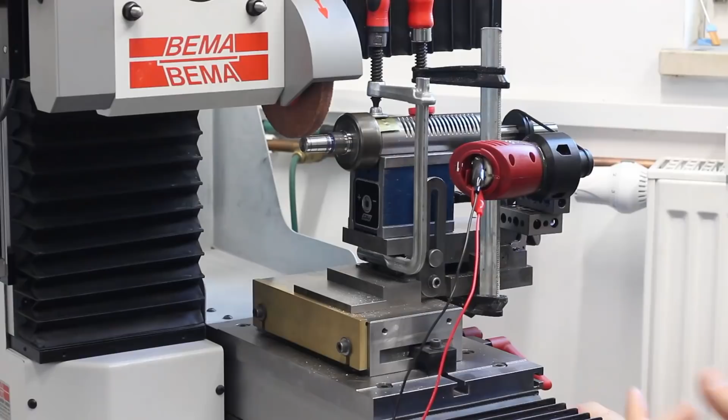So as you can see, we're grinding another drill press spindle here on the surface grinder, and the new BEMA grinder with its way larger work envelope than my old lip surface grinder has made a huge improvement in doing the setup very fast and easy. For one, the additional Z height, or in case of a surface grinder, that's the Y-axis moving up and down, if you go by the correct nomenclature.

Correct nomenclature on a surface grinder: table traverse, X-axis. Grinding wheel side to side is the Z-axis because it's in line with the spindle. On a machine tool, always, if you use the right nomenclature, the Z-axis is in line with the spindle. On a lathe, the bed slide or carriage is the Z-axis, and the compound slide is Z0 because it's at 0-degree position, also in line with the axis.

And the height movement on a grinder is Y. This is basically the same as a horizontal mill. There is an ISO standard for that, so not terribly interesting, but maybe good to know. The additional height here allows me to use a proper sine plate. I bought this years ago from my day job. They wanted to throw it out, and I got it along with the Moore rotary table and some other stuff. And on my lip surface grinder, this is way too tall to use.

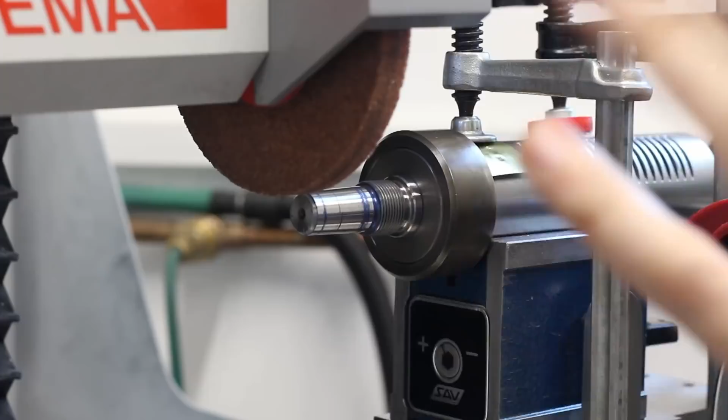So let's proceed on grinding this taper. While we're here, I will look at the grinding wheels that I use commonly later, but first we have to finish this.

So this was a 0.01 millimeter depth of cut, means 0.02 millimeters in diameter. And now the magic, get the table out. As you can see, the taper does not clean up, and it won't, because there is really heavy galling back here, but the galling is below the surface, and we still got a huge bearing surface here on this taper.

And I really do not want to draw this taper back much more, otherwise we will have to shorten the thread here, and the customer has to shorten the nut that's used to push the chuck off the spindle, and it creates a whole lot of additional, well, not problems, but issues.

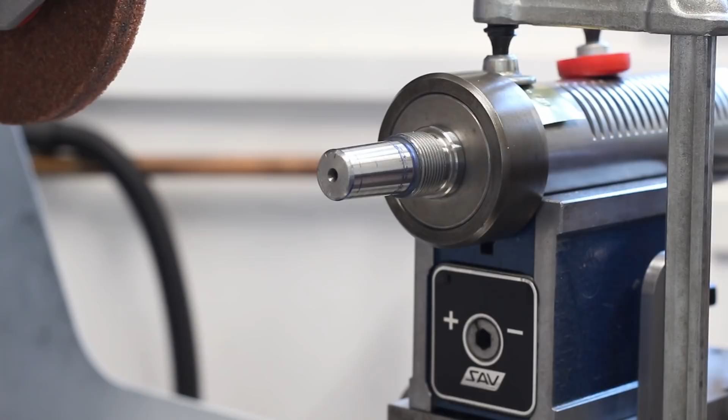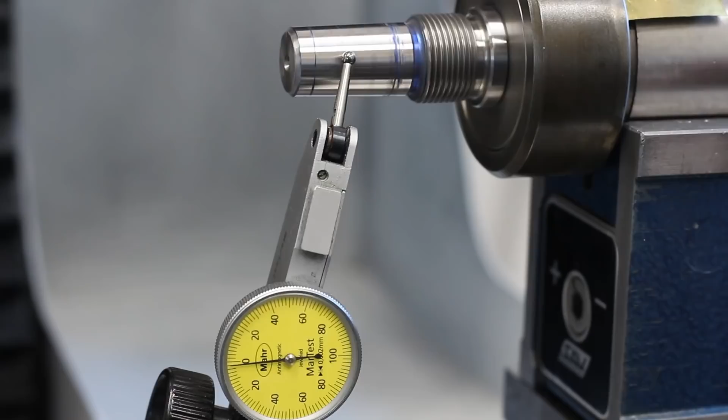So just to give you an idea how well this taper runs after grinding it in its own bearings, this is a 2 micron indicator. We have contact. Let's zero it out. This is truly not bad. That's how most drill press spindles come out after grinding them.

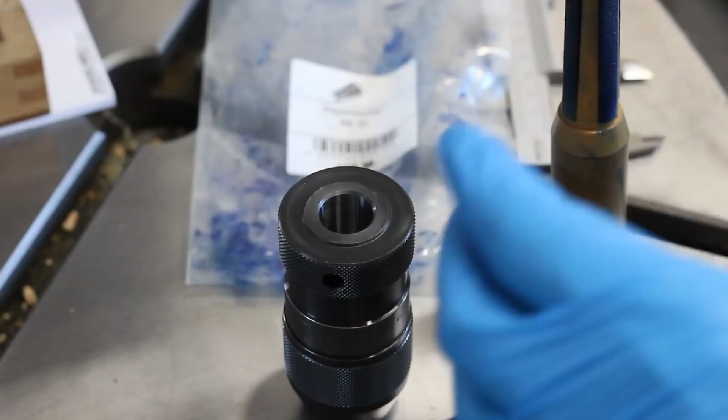The trouble with checking tapers is you always need a taper master. You can either buy one, very expensive. You can make one if you're set up for it, like ID grinding, but then you still have to check it. You can check them, for example, with 2 gauge balls of different size that you drop in the taper, and you check the depth that the ball drops to with a very precise indicator, and do your math and figure out if the taper of your gauge that you made is correct.

Or you use a known good taper like this Röhm drill chuck, which I trust. And then you need some high spot blue. In this case, I'm using the Dykem stuff because this gives a very, very good print. That's also the reason why I wear gloves, because the stuff never gets off your fingers again. And to apply it in the taper, I use an old Morse taper wiper. This has proven to work very well.

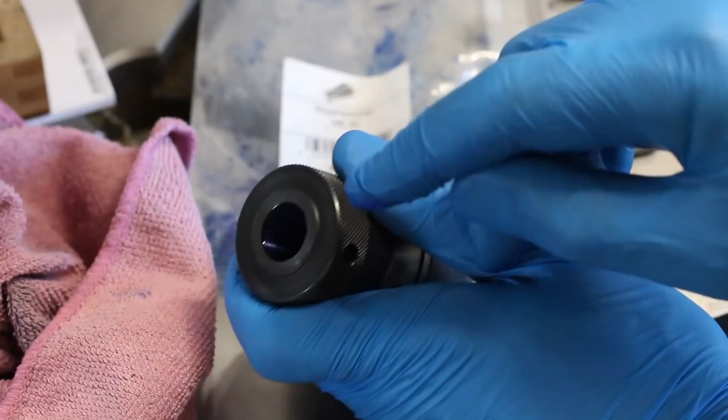Just a little bit, well, that's a little bit more than a bit, on the leather of the wiper. Try to keep your gloves clean. And then you can just use this to put a thin layer on. You will get some practice on how heavy the blue has to look to get a reasonable result when doing your checkup. With the Dykem, it will always look relatively dark because Dykem has a very heavy pigment in it, but it spreads out very thin.

That's why I like it for tapers. It shows a very precise print. And you get just an even coverage all around. That's the benefit of using the wiper here instead of trying with your finger or with a piece of shop towel or something like that.

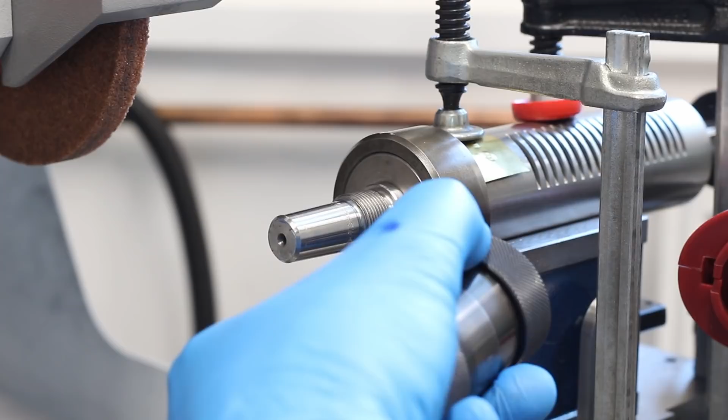So the next thing that I constantly see people do, they take their master or gauge onto the taper and they spin them like crazy. Spin them back and forth, and just with your hand motion, you will make every taper fit perfectly that way. You will cantilever it slightly, spin it, and that way you will nicely blue up the whole taper, but that's not what you're after. You want a realistic representation of this taper in relationship to this taper. Otherwise, we could just skip this and have dinner.

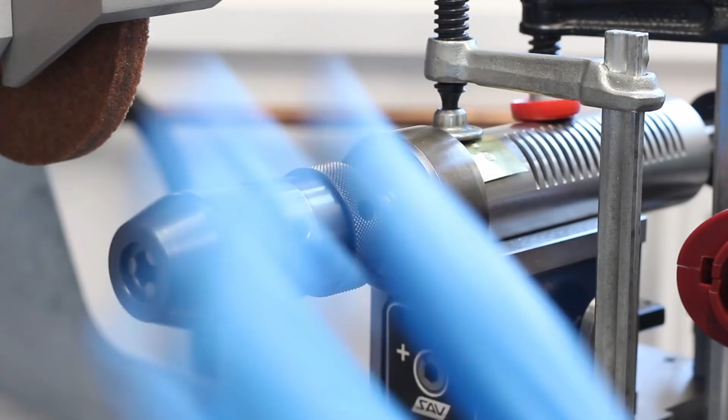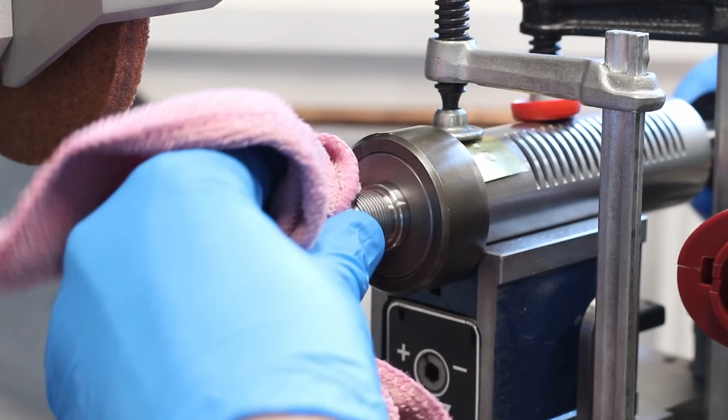So what works better is you take your master, you put it on, you press it on. We don't spin it around, we just press it on, and then we get it off again with a very minute spinning. And even this, as you can see, is a blatant mess. So we will redo it. I had too much of the layout blue on here. To be honest, bluing up tapers is one of the most annoying tasks I can think of.

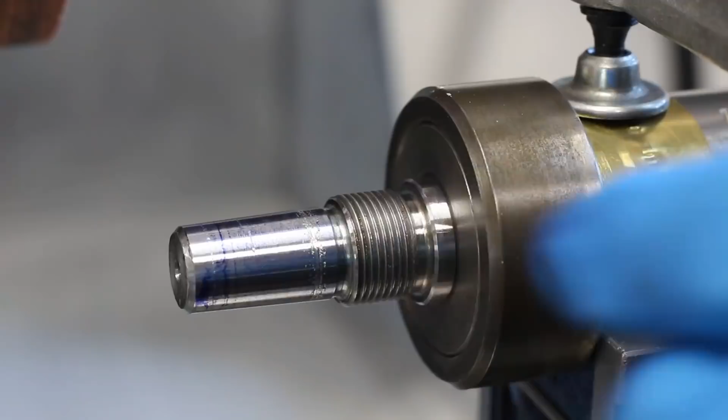Press it on and give it a slight twist to get it off again. You can see this slightly heavy line out here. This is where the taper in the drill chuck ends. There is about 30 millimeters of depth in the drill chuck, so we have enough clearance out the back. But you can see a very, very faint covering with blue all across the taper here.

So this is really a nice fit on this drill chuck, and I won't touch it. The scaling here, it's not pretty, but we will keep it like that. I'm not going to grind it out. I'm of the opinion that instead of removing a ton of material from a good spindle to get some cosmetic marks out, I would prefer to keep as much material for future rebuilds as possible.

So we're not going to touch it again. I'm fairly happy with this. And as I said, a good inspection should be repeatable. Okay, this is about the thickness of bluing on the ID taper of the drill chuck that I'm using now.

As I said, inspecting tapers, not a fan. Okay, we press it on. Now to get it off, give it a slight twist to break the taper. And as you can see, we get really a darn good result over the whole surface.

While we're here, we can look at my drive system. This is just a very cheap electric screwdriver. I 3D printed this piece here out of plastic and epoxied it to the front of the cordless screwdriver. This gives me a mounting flange. 4 holes that I can put a bolt through or something like that, like here with a single M4 screw. Bolts it against my setup blocks, and these setup blocks are clamped against the sine plate.

And I have a pulley on a 1/4 inch hex shaft that goes in the spindle of the thing. And I make endless O-ring belts. I just buy the O-ring cord and super glue them together end to end. Then I make a simple pulley out of Delrin or whatever I have laying around. And this goes on here like this and on here like this. A little bit of tension. You don't need a lot of tension to drive with an O-ring. Then you can just run it with a power supply.

It's obnoxiously loud because of all the straight toothed gears in here, planetary gear drive, straight toothed, and of course it's made of highest precision. One thing that I want to do to it on this plastic flange, I want to add an aluminum spacer with a single ball bearing in it that supports the hex shaft, because right now I'm putting all this side load on it and there is just a plastic bushing in there, and that can't be good over time.

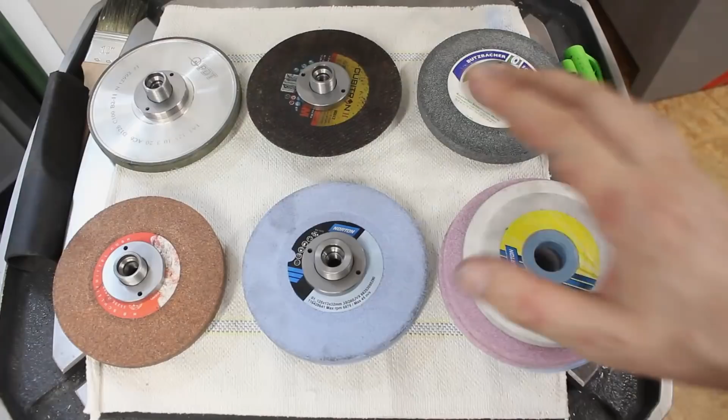So I wanted to talk briefly about the grinding wheels that I use on my surface grinder, and I minimized my selection. I have 5 wheel hubs for the machine currently because these are very expensive. I plan on making a set myself. These are balanceable, but with a 125mm wheel, balancing is, well, it's good practice, but it's not strictly necessary. It's good practice to true up the wheel on its diameter and on both sides.

And usually if it's not a complete crap wheel that is very inconsistent in its structure, this will be good enough with such a small wheel that you will not see any noticeable wheel hop. Still going to make a balancing arbor, and I will balance some of the wheels, those who are on balanceable hubs. But something like a cutoff wheel does not need to be balanced.

So what I came down to is, this is my all-purpose grinding wheel for hardened materials, hardened steels. This is a 46 grit hardness J aluminum oxide wheel. Bog standard aluminum oxide, made by these people here, HB Hobby Schleifmittel GmbH here in Germany. A very inexpensive wheel. I think this is about 12 or 15 euros per wheel, and you get a lot of parts out of one wheel.

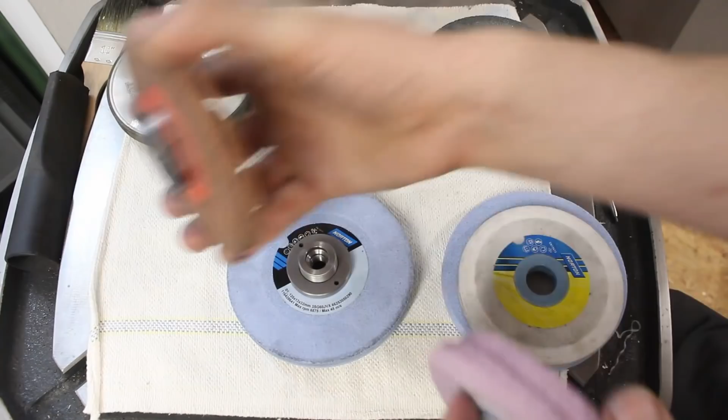It just works. These are the same wheel as this one, hardness J, 46 grit aluminum oxide, just a slightly narrow wheel. So sometimes you might have to grind a slot or something like that. Then a narrow wheel is nice because you don't have to dress down the size of your wheel that much. So these are a little bit more specialized wheels.

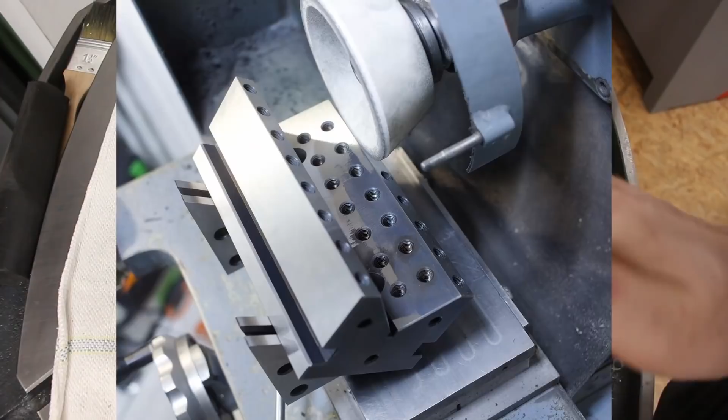Some of them are of my tool and cutter grinder, but they are also useful on the surface grinder. First one is a tapered cup wheel. I think this is also a Norton 38A, but 80 grit, fairly fine wheel. This is primarily used if you want to do any kind of tool grinding, or what I have used it for is to side wheel a relatively large part. A relatively tall part where I couldn't get in with a regular wheel for side wheeling. Not fun to do, but sometimes that's what you have to do.

A tapered diamond wheel, D126. This is also mostly useful for tool grinding, where you need a very, very sharp edge. And also you have to be careful. The corner of a diamond wheel will break down when you use the wheel excessively on the corner.

Diamond cutoff wheels. These are resin bound diamond cutoff wheels. They cut fairly nice, fairly fast. You need those to cut carbide. If you want to shorten an end mill or make a specialized cutter, you need these to cut the carbide. Yeah, you can kind of score carbide with a small Dremel diamond wheel and snap it off, but usually if you do that, you create micro fractures in the carbide and hairline cracks through the entire piece of carbide, and it's a mess. Very bad results doing that.

And these are also two diamond wheels, D76 and D126. This is finer, this is a little bit coarser, but the interesting thing about this one is, or both in fact, this is a full radius and this has a defined edge radius. This is a 0.5 millimeter corner radius and this is a 3 millimeter radius. What you need those for is for form grinding carbide.

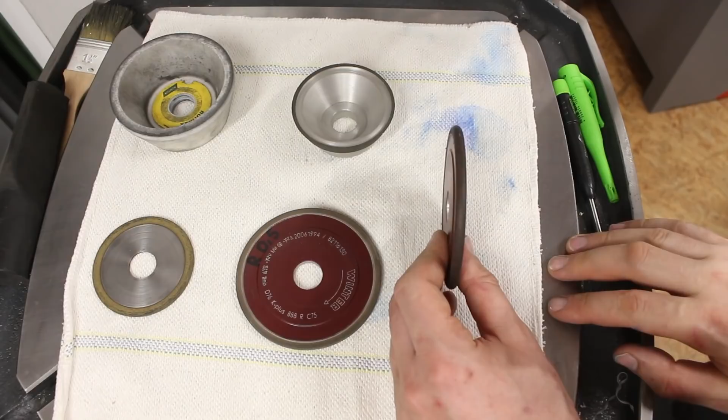You can not only form this full radius, grinding a concave slot or a concave corner, but using math and figuring out your tool path, and especially if you have a DRO, you can use a formed radius wheel or a wheel like this, like you would a bullnose or a ball end mill on a CNC mill, and step off a profile and grind a profile that way. I learned this technique from Adam the machinist, and it's a very powerful technique if you want to grind carbide but don't want to pay money for a specialized form wheel and don't have a CNC grinder.

So these are really specialty wheels that you don't absolutely need apart from the diamond cutoff wheels. These are super useful. I did not mention CBN wheels because I don't have a surface grinding CBN wheel. I have no experience with those. I have a CBN cup wheel for the Deckel grinder. I didn't use it very much.

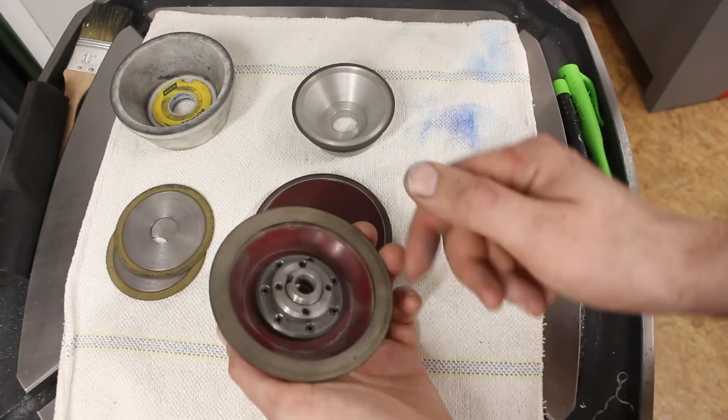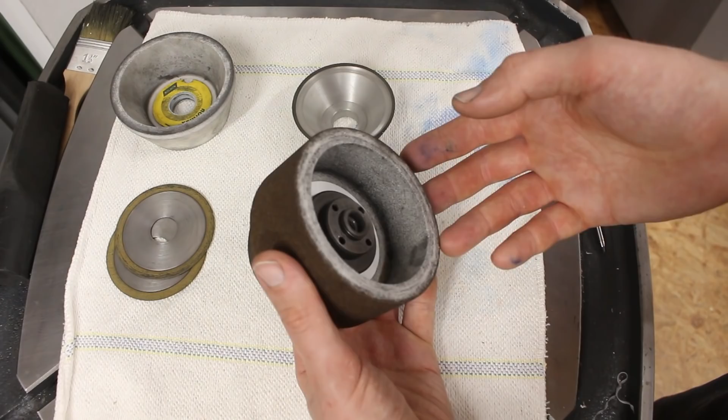On a Deckel grinder, I tend to take very hard cuts, especially in high-speed steel, and this wears down the edge of the CBN wheel quite rapidly, and these are, just as the diamond wheels, very painful to dress back into shape. May be useful: a regular straight cup wheel, 80 grit. This is normally used on a Deckel grinder, but it can be useful on a surface grinder if you need to side wheel. These two do basically the same, but this one with the taper has some advantages if you want to do tool grinding too.

So then I had this Kuroda boring head for a very long time now. I did a video where I did a full teardown of this, and I modified it to be an ISO 30 taper to fit the new spindle of my milling machine. So I have a section of modifying an off-the-shelf ISO 30 Weldon tool holder, cut it down to fit the boring head here. I replaced the spindle of my mill from Morse taper 4 to ISO 30. I went from this Morse taper number 4 taper to an ISO 30, a number 30 taper, for various reasons.

For one, these are super easy to get. These are dirt cheap, new. Everybody sells them because they're basically used in every Robodrill or Speedio CNC mill, and those are everywhere. You can get them used, you can get them new. This is an end mill holder, Weldon style, with a screw pushing in from the side. This is like 30 euros, and as I said, very good quality and easy to get.

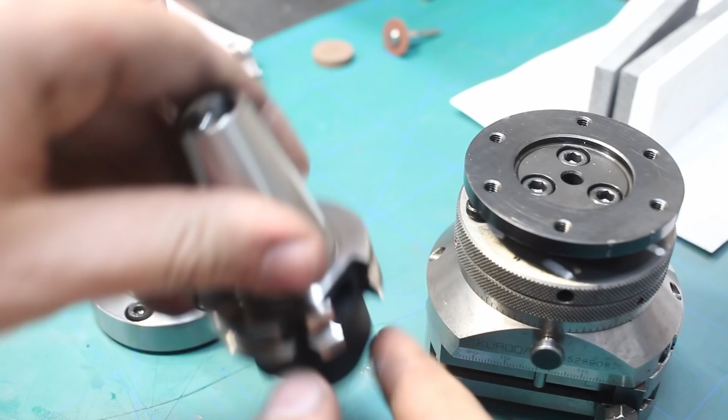Morse taper 4, on the other hand, is very hard to get these days because it's kind of obsolete. Morse taper 4 is used in large drill presses, lathe tailstocks, and lathe headstocks, and also it was used in manual milling machines a lot of years ago. But these days it's quite hard to get Morse taper 4 tooling, or any good Morse taper tooling for that matter, because there is not much need for it anymore.

And when you want something more exotic than a regular collet chuck, this is a Morse taper 4 ER25. This is made by Bison in Poland. This is a very good collet chuck, but this costs about 90 euros. An ISO 30 ER25 collet is like 50 bucks. So it's cheaper, better, easier to get. Yeah, overall just the more sensible choice these days.

Not saying that Morse taper is bad. Morse taper is an excellent taper, basically. It runs very true. Morse taper 4 is about the same gauge diameter here, large diameter here, as ISO 30, so the stiffness is very comparable, but the taper here in the ISO holder is very steep. That's why we call it in Germany a Steilkegel, a steep taper.

And this comes out of the spindle very easy. A very light tap on the drawbar is enough to have this drop out of the spindle. This needs a little bit more percussive force to come out of the spindle because the taper is very slim and it just wedges in the spindle more.

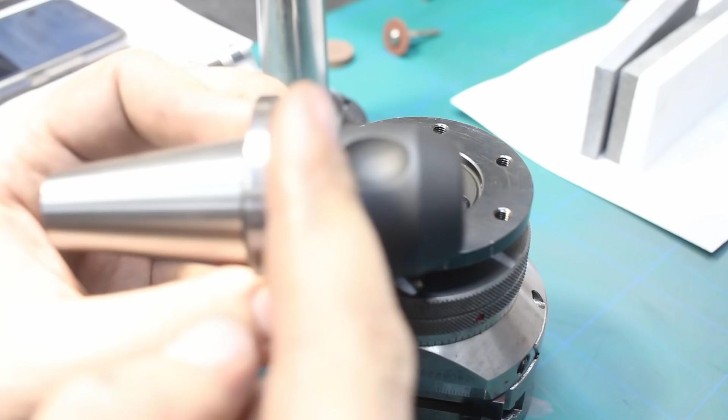And my idea was to take this Weldon holder, cut off all in front here, this section here, cut it off, turn this diameter here down, step it down so it fits in here, and make a flange that pulls everything together. Let me show you a sketch.

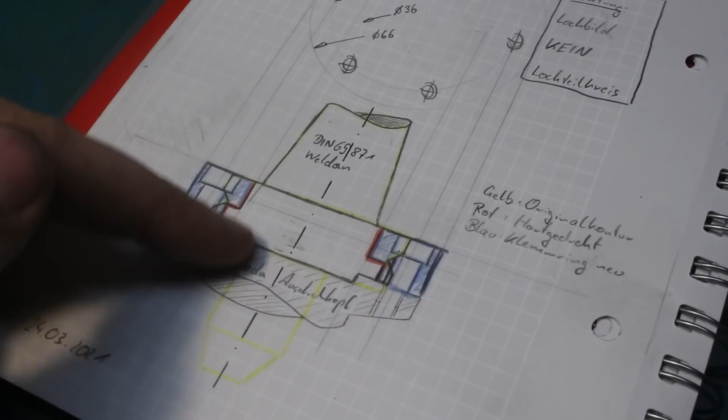Cross-section view. The yellow thing here, this is the Weldon holder. This is the original Weldon contour. The red contour is what we're going to hard turn on here. Blue is the mounting flange that pulls the Weldon shank against the boring head flange. And that's it. It's relatively easy.

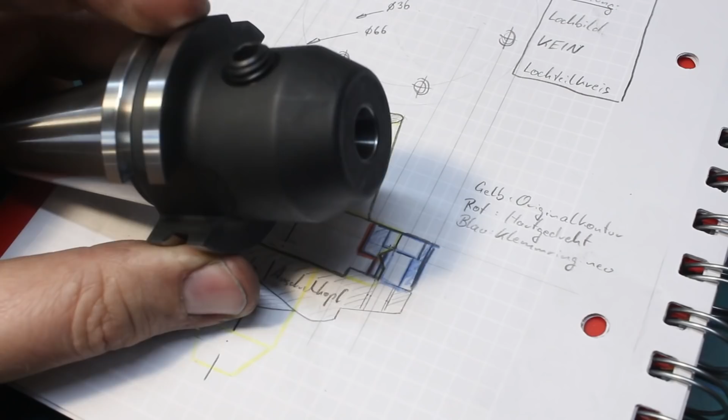The only problem is these are hardened. Not much of a problem. It's just you have to know that it's hardened and know how to machine it. We could either just abrasive cut off the end here, or we can hard turn the material away. I think we're going to hard turn it because why not? I think these are just case hardened, not through hardened. Nice hardened set screw. We'll take that aside. So yeah, let's take this holder and modify it.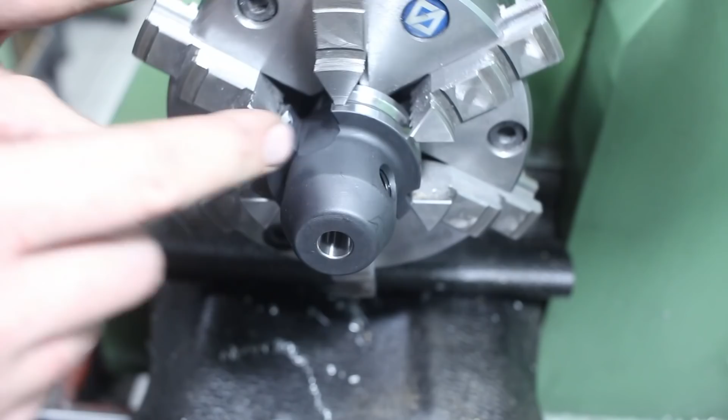So I have the weld-on tool holder in the six-jaw chuck, clamping on the machined outer surface here. And now I'm going to indicate the bore in. This is not strictly necessary. For a boring head, it's not crazy important that it's running true because it's a single point tool. But I still want it to be reasonably running true, just so it doesn't create any eccentric forces, which is also theoretical for a boring head because it's inherently off-center. But still, do it properly.

Set true chuck, 2 micron indicator. Okay, that's already pretty close. Okay, that's pretty much 0. Now we can do our machining.

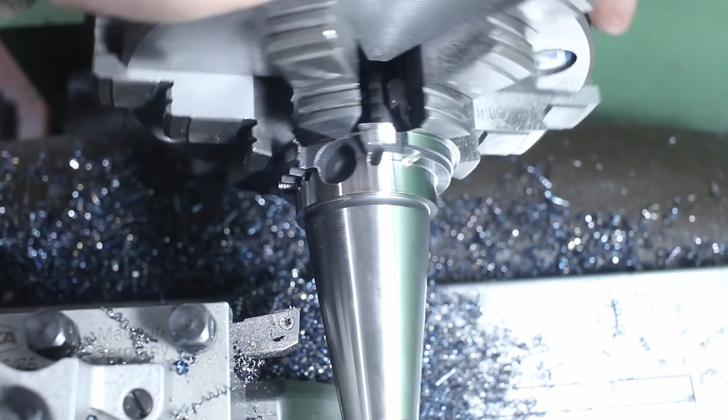This looks a little bit chaotic because we have the balancing holes, drive slot, the data chip bore, and the other drive slot in here. All that will not be seen after we add the clamping flange over it all. It will be a very clean looking modification. But right now this looks like a mess, which it is in fact. So let's check this OD. This doesn't need to be a precision diameter at all, because the flange will have an oversized bore.

Okay, there we go. That's the modification to the shank done. Only thing that's left is we need to grind away this remaining material here and deburr everything.

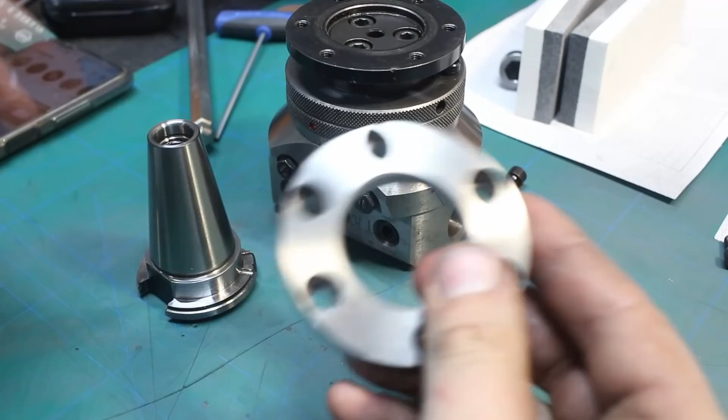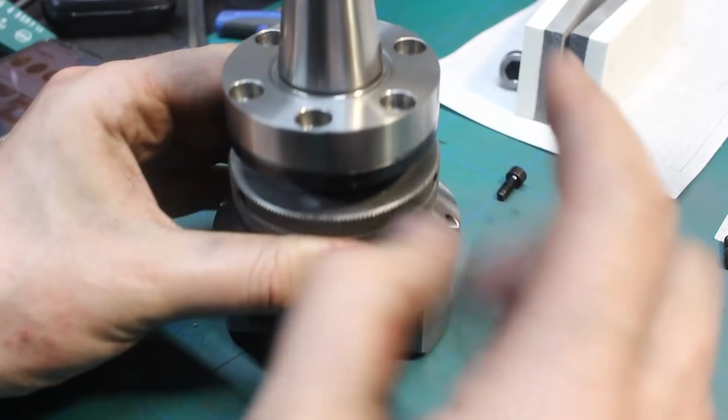I was able to salvage this ring of the other boring head adapter that I made some time ago, and I just needed to bore it out with a step on the back side, and this goes over the ISO 30 shank here. It's captive because it's registering on this step here, and this gives me the bolt hole circle, or bolt hole pattern more, that matches the boring head. Put 6 screws in, done.

That's the boring head in the spindle of the mill. As you can see, it's sticking out only 10 millimeter additional to the spindle nose. Basically, it's sticking out this length of a normal tool holder. So it doesn't get much shorter with this Kuroda boring head.

It's quite a massive boring head, but if you keep the slide kind of on center and you design the boring bars in a way so you don't move the slide off center like crazy, it's very usable even at higher speeds. Currently I have it at 500 RPM. And that's spinning very nicely. 1000 RPM is the limit for this head. You don't want to go much faster with this size of boring head, especially if you go off center.

You can run this with auto facing feed. For that you engage this pin and you pull this pin out. Then you have auto facing feed, means you get extra gear reduction between this ring and this ring, which feeds the slide. As you can see, it's moving out. It's not recommended to do this by hand, of course, because safety.

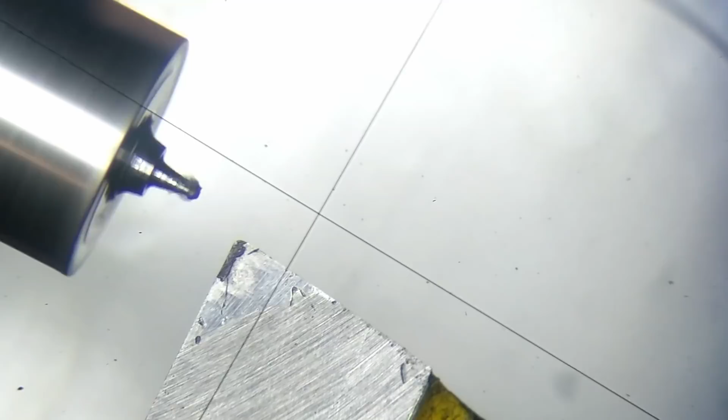So some micromachining. The raw stock here is about 4 millimeter in diameter. This is roughed out of a bigger chunk of material because I couldn't get stock small enough. The tool I'm using is a brazed carbide tool with a half decent grind on it. Nothing spectacular, not even much lapped, because this is my roughing tool. I use cutting oil in this case, and you will see later why.

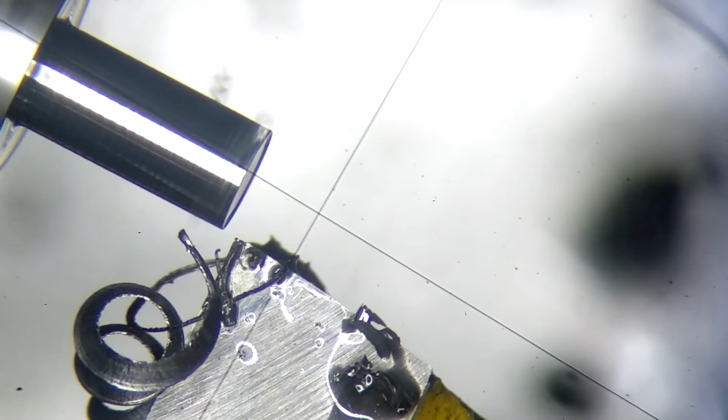I'm running a relatively low surface speed just because the part is very small and my lathe tops out at 2000 RPM. Here you can see why we need cutting oil. The second the cutting oil is not covering the cutting edge, the chip gets very crumbly and does not run off the tool very well. In comparison, now with cutting oil, excellent chip. At this point we're just hogging down material.

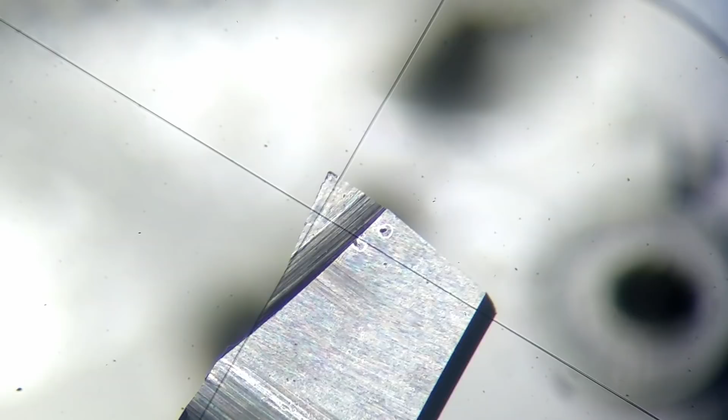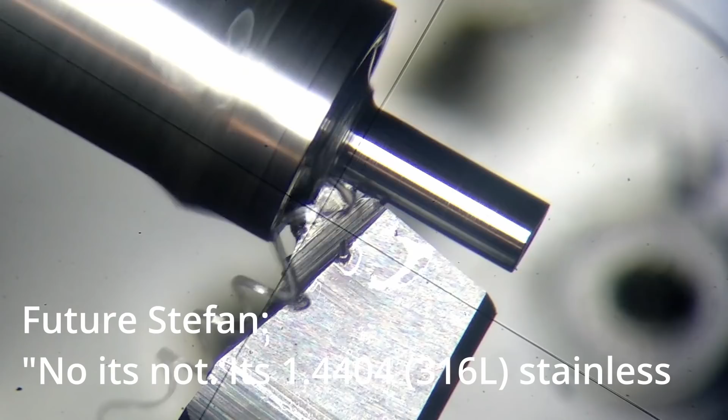We changed to a solid carbide tool that I use for finishing. This tool is lapped, but it also needs cutting oil in this special material. This is 1.4404 (316L) stainless steel. It's about the toughness of 4140 chromoly.

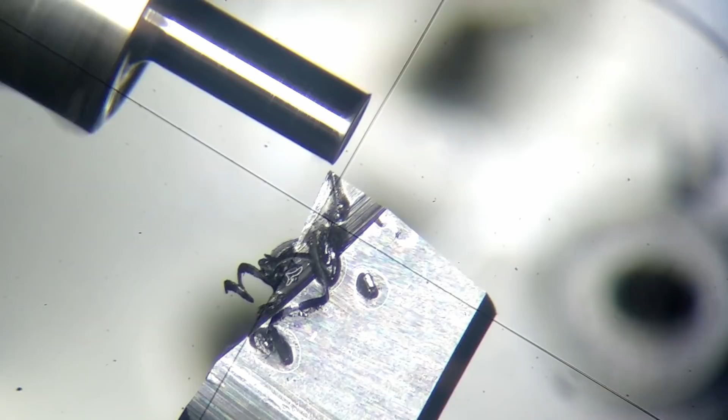Roughing out the shoulder. Well, roughing. We're taking relatively light passes here. As you can see, it's pushing out a little bit of a burr. But we will get rid of that in a second when we take our final finishing pass on the shoulder and the OD. Turning the OD, going up to the shoulder, pulling the tool back, and turning the large OD to final diameter. And suddenly the burr is gone.

Changing to a 0.5 millimeter radius tool here. Touching off on the end and slowly feeding in. Once again with cutting oil until our radius is formed nicely.

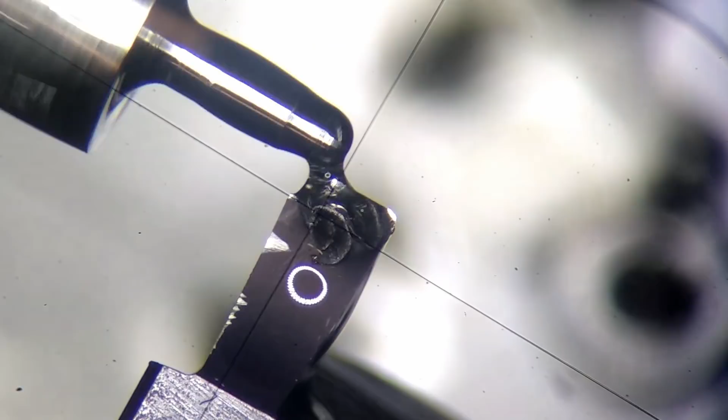Cutoff tool with the leading edge of the tool ground so it's on the right side, so I can cut a shoulder on this side. Plunging in and moving sidewards, roughing out the shoulder. Taking a finishing pass.

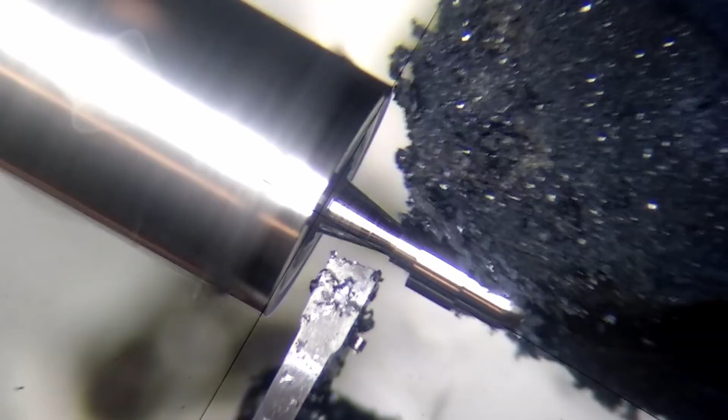Scoring the part where I will cut it off. Cratex stick. This is a rubber bond silicon carbide abrasive. I use this for deburring and polishing before I cut it off. This just breaks all the edges very mildly, polishes all the exposed surfaces, and removes any hairline burrs.

Blowing off the abrasive, adding some cutting oil, and parting it off. Sometimes parting off small diameter works without a huge nub. In this case, not so much. Huge nub left. This is, by the way, the setup I used to film through the microscope.

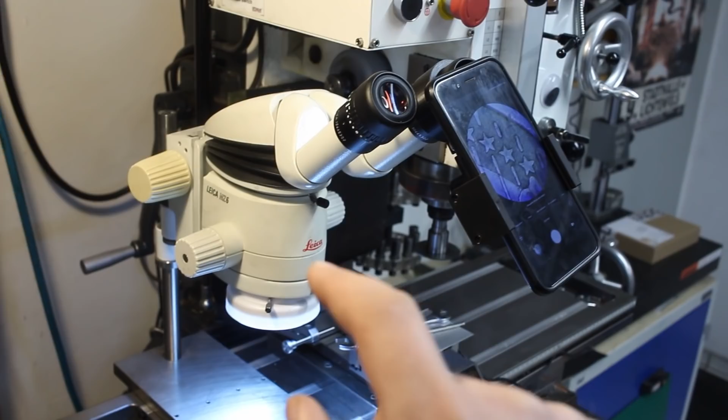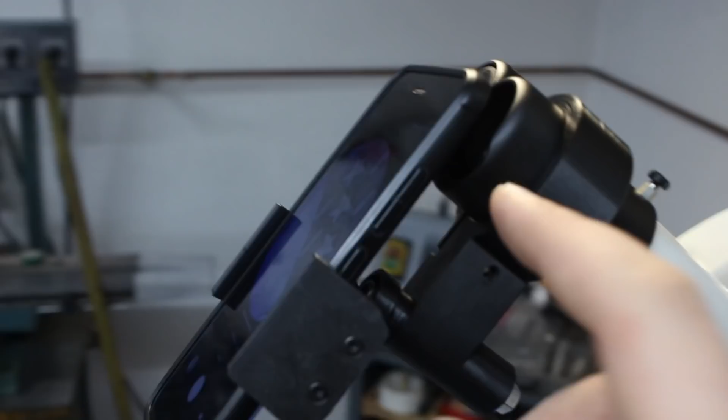I have the Leica MZ6 microscope here and my phone. And I 3D printed this contraption, and it's just pointing the camera through the eyepiece. And when you look here at the screen of the phone, this is a pretty decent image. This is full magnification and this is lowest magnification.

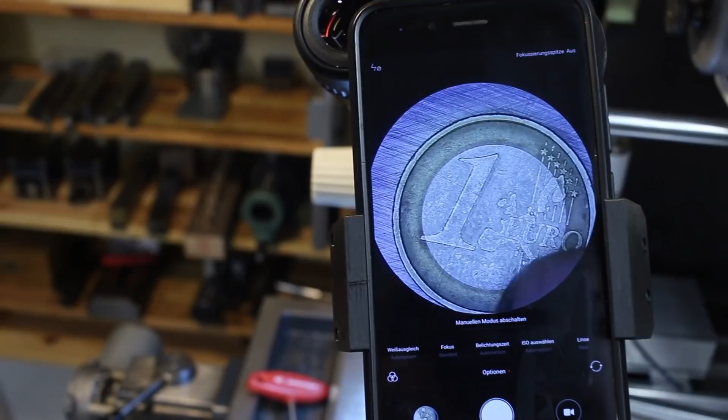This is a standard €1 coin. But yeah, the zoom is pretty good here. And the image quality through the phone is also bearable. It takes, I think it's even 4K video, so pretty good. I can crop it to size to get it onto a normal aspect ratio.

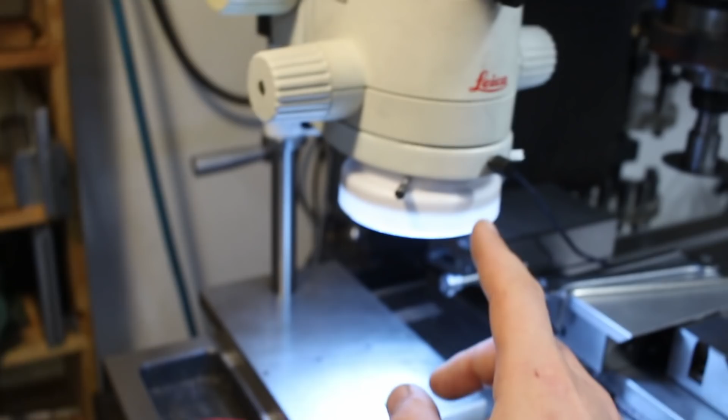And yeah, that's the microscope stand that I built. Cheapo ring light, and that's it. Here's the clamping screw that holds it. This part here can swivel. It has 2 Belleville washers and a nut down here to give some tension and still allow it to be adjustable to get the phone into focus, which is a fairly precise setting.

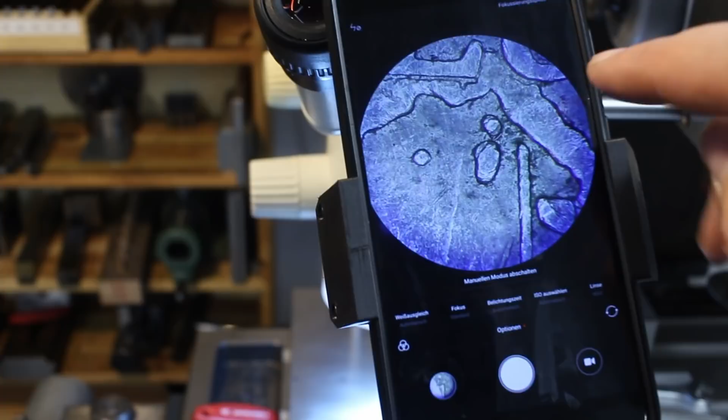It's not like you just eyeball it. You have to get it right to get a pretty decent image. Right now it's not set up properly because we have this dark haze around here. That means the phone needs to go up a little bit.

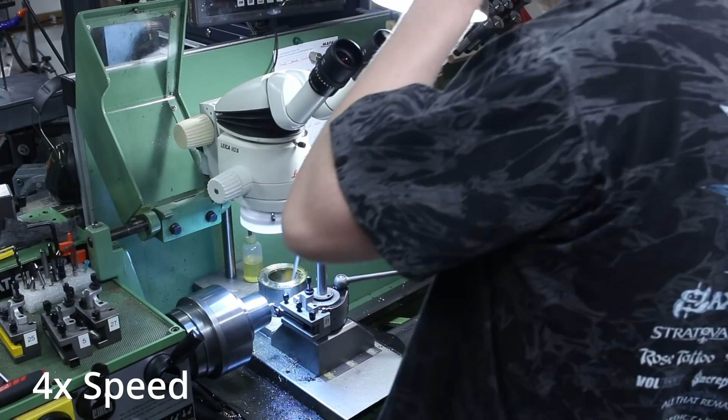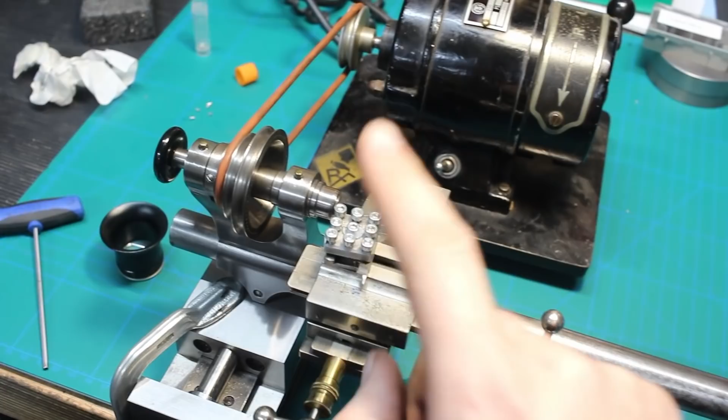Got all the parts in 316 stainless done. Then these will get sent out for plasma nitriding. I dragged out a very seldom used tool for me, the 6mm Lorch watchmaker's lathe. Normally I don't use it much because the Emco lathe with its digital readout and the very rigid tool post and the repeatable setup tooling does all the turning, even the tiniest diameters, very well.

But in this case, I need to clamp on a finished diameter with 1.6mm diameter, and I don't have a collet for the Emco with that diameter. I could either bore an emergency collet to 1.6mm or make some kind of a sleeve. But for the Lorch, I have the collets in 0.2mm increments. Means I have a 1.6mm collet, and I can easily hold the part in here to face the back with this tiny high-speed steel turning tool.

The way I'm running the watchmaker's lathe is probably a disgrace to every watchmaker out there. But yeah, I don't care.

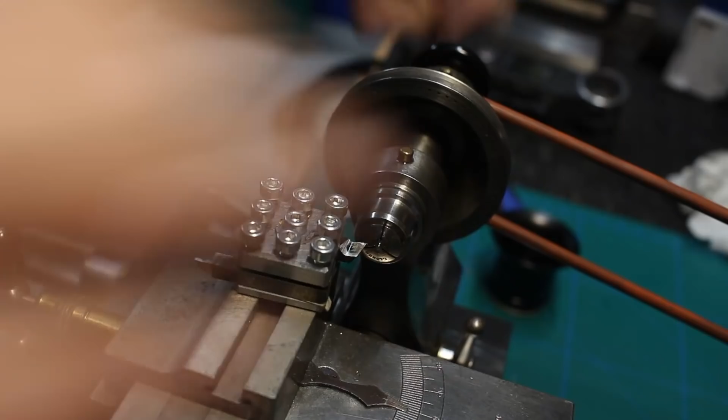Okay, faced off the end of the part. Now we take our tweezers and get the part out of here and drop it in the finished part test tube. And here's the next one. Grab it on the small diameter, insert it in a collet, kind of place it in the right spot, tighten the collet.

It has this super cute little draw tube with a Bakelite handle on the back to tighten the collet. And that's enough to tighten these tiny 6mm draw style collets. By the way, this headstock of this watchmaker lathe is running in plain hardened steel bearings, and the shaft itself is also hardened, so it's running hard on hard. And you just add a tiny amount of super thin spindle oil to them, and they will probably last forever.

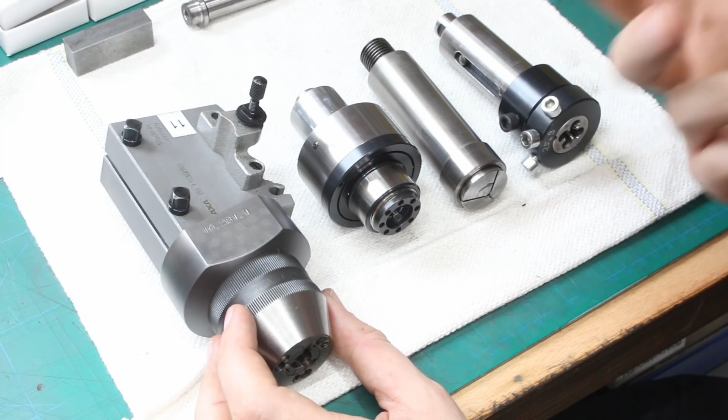In the last video where I talked about drilling with the carriage, which was a very controversial topic, one person even said they would fire me if I did that in their shop. So that's a very radical opinion, I think.

When I did that video, I forgot to mention some things. First of all, I want to show the heavy-duty CNC Mimatic drill chuck in use. It's here in the boring bar holder. The VDI interface fits into a regular round boring bar holder. And as I said, these are worm drive.

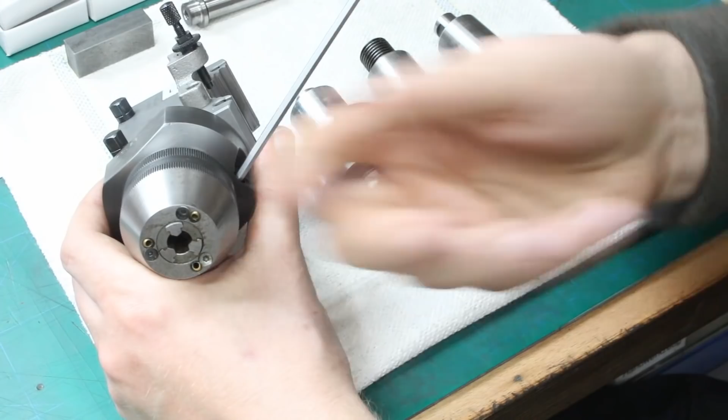When you go in here with a hex and you spin it, you will extremely slowly close the jaws and exert a ton of holding force on the tool you're holding. These are especially nice if you want to hold a tap, because these will under no circumstances loosen when you run the lathe in reverse. Never. It's a good idea to use a torque wrench on these, because if you over tighten them, you will strip the worm in here, or the worm drive.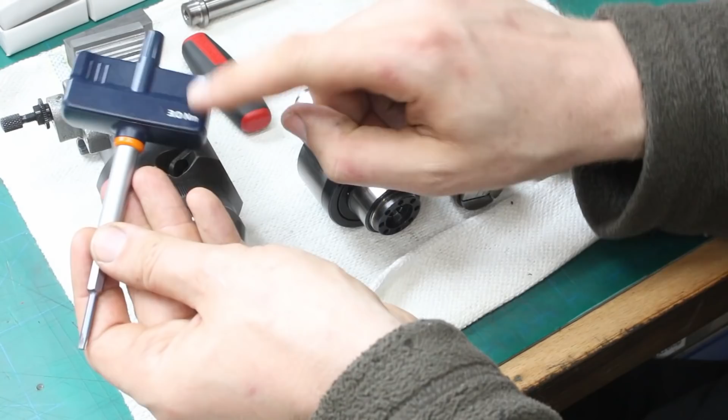Somewhere on here, there is a torque value that you should tighten them to. And then an inexpensive torque wrench like these, which are used for insert tooling. These are single torque, fixed setting, and you just put in the fitting key and you tighten your chuck with this. So I use this for large taps like M10, M12, or large pipe thread taps. Won't let loose on a drill. So that's one thing.

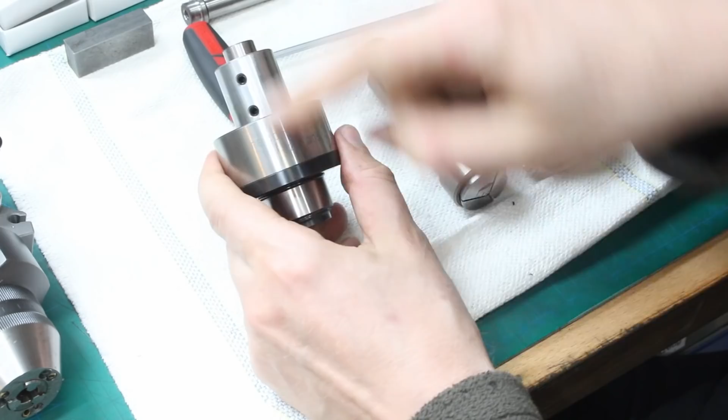I was asked if I use the setup for reaming too, and yes, I do. Either by just holding the reamer in a drill chuck, or if I have to do a lot of parts, I will set up a floating reamer holder. This one is made by Regofix, a Swiss company, probably known for making collets and collet holders. Its number is 820005. It has an ER20 collet seat in here for a regular collet, and this flush mount nut. So this is basically an ER collet chuck with an integrated floating tap holder.

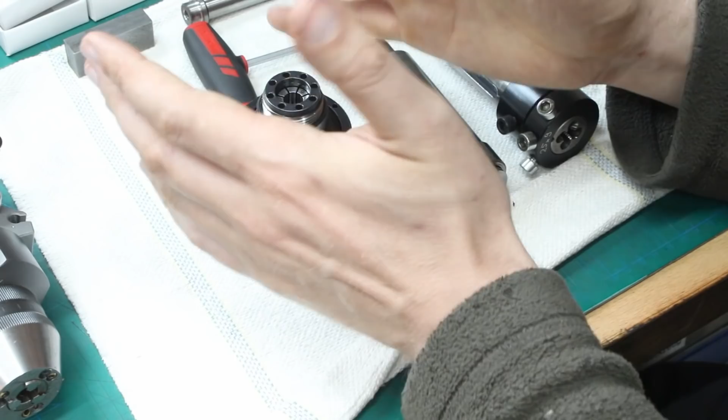Means this has about 1 millimeter to each side of give, so the reamer can self-align in the pre-drilled and pre-bored hole. Very useful also for tapping, especially when you tap in plastic and your tap is not 100% on center with the pre-drilled hole. If you hold the tap rigidly in a drill chuck or a collet, you will bore out the thread with the tap and make an oversized hole. With the floating reamer holder or floating tap holder, that will not happen. So that's the benefit of this. Don't use it a ton, but when I do, it's nice to have. Relatively slow to set up due to the collets.

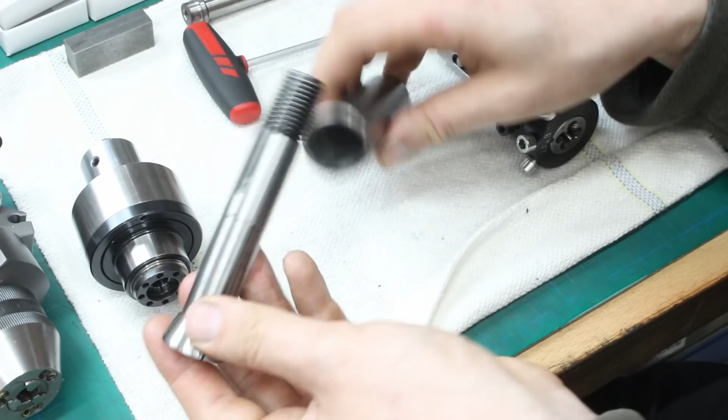Then something I made for myself. This is just a sleeve. I think this is turned from 42 chromoly with regular commercial heat treatment. Then I had it plasma nitrided, so it has about a 0.7 millimeter thick hard layer. The plasma nitriding doesn't change any dimensions, it just makes it very tough and hard, and also a little bit corrosion resistant. And this is so I can use the Deckel S20x2 style 355E collets that I have, for example, for the tool and cutter grinder. I can use these collets in the same boring bar holder.

I can do this, for example, if I want to hold a small tool or a small drill with good runout and very little overhang. For example, when I change tools a lot, I don't want to move the carriage a lot because the drill chuck is reasonably long, and change to a very short tool, and this just gives a little bit more options. Another option, of course, is a straight shanked ER collet chuck. I use this with a reduction bushing, also in the boring bar holder. This uses ER20 collets, just as the Regofix floating reamer holder here. Also, this is nice for holding.

And lastly, what I absolutely forgot to show is my OD threading setup if I'm not single point threading. These days, most threads I single point, but for low quality threads, I just use a die. And this is a floating die holder. It's just a sleeve with a pin and internal bushing, and you can exchange the die holder in there. And I have a full set of die holders. I made some of them myself, and some came with it.

This is usually the accessory for a very cheap import revolver head, quick change head for a tailstock. But this fits also in the boring bar holder. I hard turned the OD down so it fits. And yeah, you can go M3. Just tighten those two screws, and you're ready to tap or thread. M3, M4, M5, 6. This is 8 and M10. And this works reasonably well.

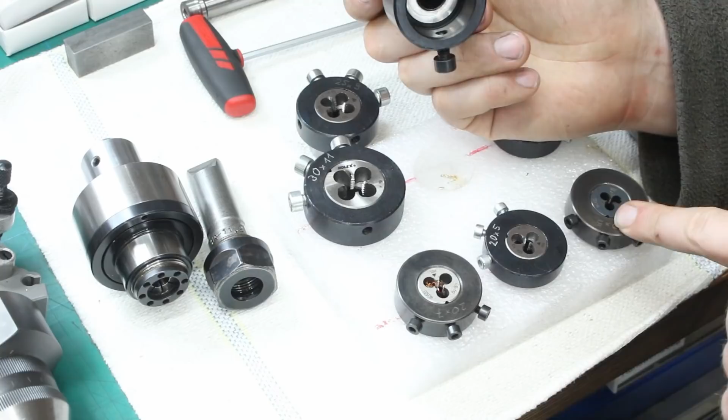In hindsight, I would not need the sliding motion here, because the carriage moves so freely. It would just pull the carriage along, even with an M3 thread. So that's my OD threading setup with the carriage. I think that's all of the tooling I use for now.